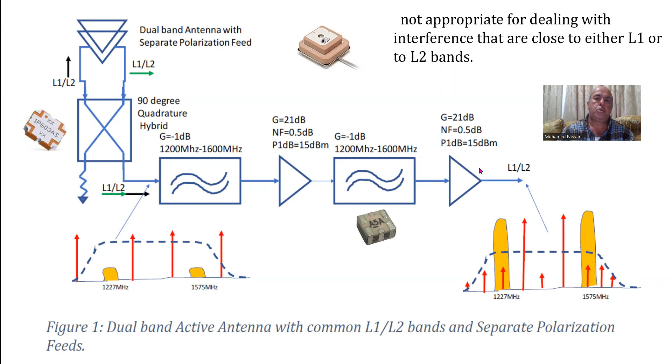So in a lot of cases, people say, well, I don't want to use this, let's go another way to mitigate this issue. And that is basically to split off the bands separately. Since we're using two separate antennas, let's make each one have two feed probes that are orthogonal. Then we combine them again and amplify, and then combine them later when you filter them and they're very clean. You can combine them and process them in the same A to D because they're so close in frequency and the levels are controlled.

So here's an antenna, which in this case is a stacked antenna. These are commercially available, there's tons of companies that build these ceramic antennas, and you buy them from China for fractions of a dollar, so they're pretty cheap.

So you get the antennas, and there are two antennas here, L1 and L2 designated, and each one will have two feeds. The two feeds are vertical and horizontal. They get lined up with the quadrature hybrid, the 90-degree hybrid, which phase shifts one of the elements so that they are actually in phase.

And then, of course, they all contain the interferences. But what happens in this case, for instance, this path here is the L2 path, which is the lower frequency one. As you can see, what we can do is get a narrow filter that filters out only the L2, and the interference all gets rejected. And if there's any leak, if the L2 antenna picks up L1 signals, those will be rejected as well. So you get a very clean signal, you amplify it.

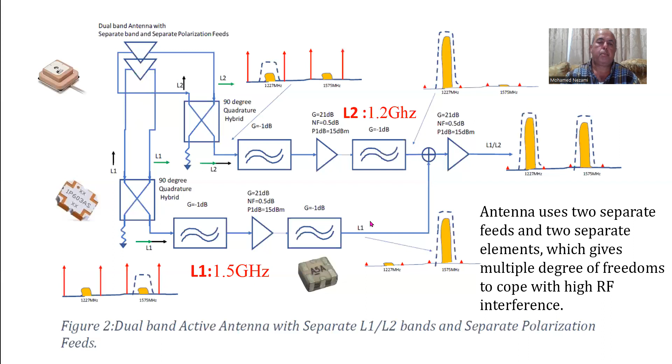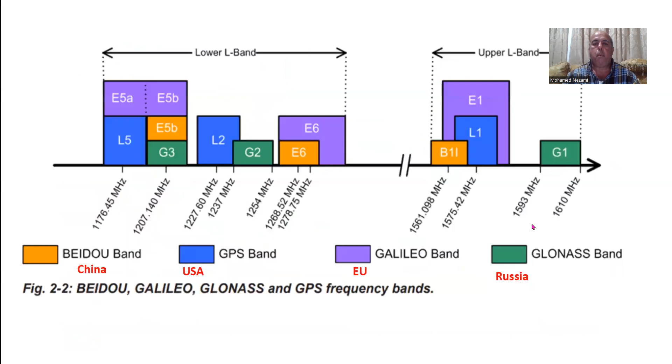Okay, so let's go to the antenna. The antenna is basically, we know that before we could do this, let's look at what's out there in the market.

If you type GPS antennas on Google, you end up with hundreds of these antennas made all over the world, and a lot of them are Chinese. All of them, literally, come in variants like this. Sometimes they would be a single band, or dual band with a single element. And sometimes they would be stacked, like in this case and in this case.

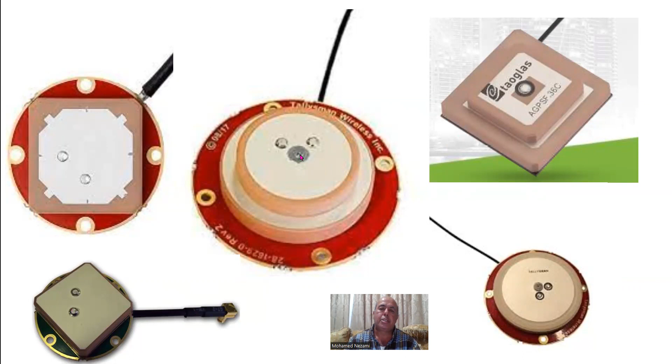They're stacked, and sometimes they have a single feed, you can see here there's a single feed, or a dual feed. This screw here, that's just to hold this patch here with this patch to the board, because this patch here, the L2, this is the rounded patch, and the L1 here, and a lot of times they have glue.

You attach them, you attach this one to this one with glue, and then you have dual feeds that go in from the bottom of the board through the L2 element. There are holes that let the pins come to this surface and get soldered here. These are both orthogonal feeds to the L1 band, where the L2 band also has two of these on this side, but you don't see them because right now they're obstructed with the L1 here, but they're below, okay?

This one you can see here has only a single element, but it does have a dual orthogonal feed. Same thing in here, same thing in here. This one doesn't, okay? So today, the design I picked to demonstrate is based on a survey of antennas in the literature, and I just happened to pick one that has two patches, and it's circular.

The first one down below is the L2 one, okay? It's basically a circular patch resonator antenna, resonating at the predetermined center frequency of L2, which is 1.227. And then it has 4 eye slots. We call these eye slots, okay?

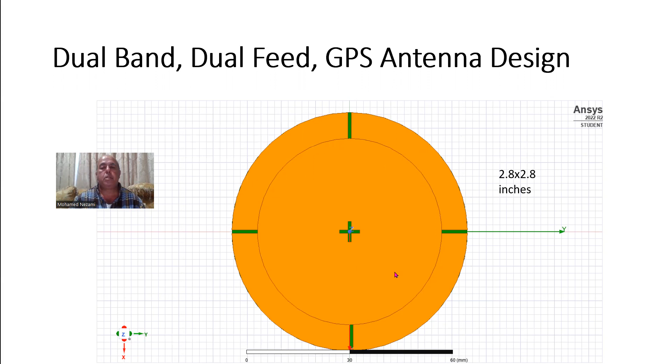The antennas that I just showed, these ones here, you may have noticed that they're all ceramics, but they're all thick. You can see that a lot of these are almost 1/2 inch or 4/10 of an inch. And the reason for that is to actually get better gain and better bandwidth, okay? Of course, doing it this way, it's heavy, and it can get damaged.

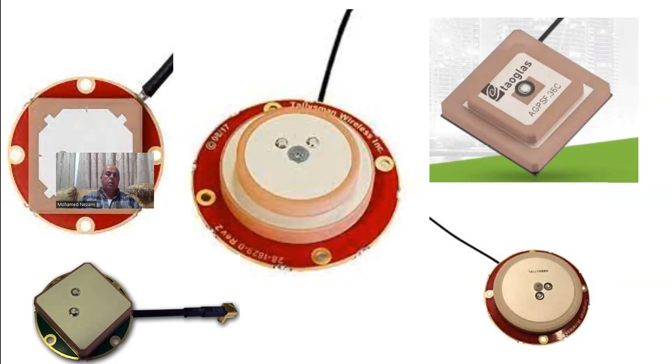So I thought, let's just see if we can make this on a substrate and get almost the same performance from, say, a 64 mil substrate, both for L1 and L2. And so that's what I did. So before we do that, let's just go to...

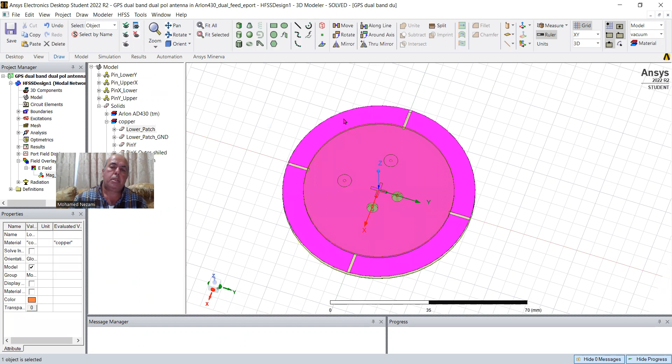HFSS. And so this is what I have right now. So I laid out, this is the L2 patch, and this is the L1 patch in here. And then I have the slots, of course, in here. And then what I have beneath is actually 4 feeds.

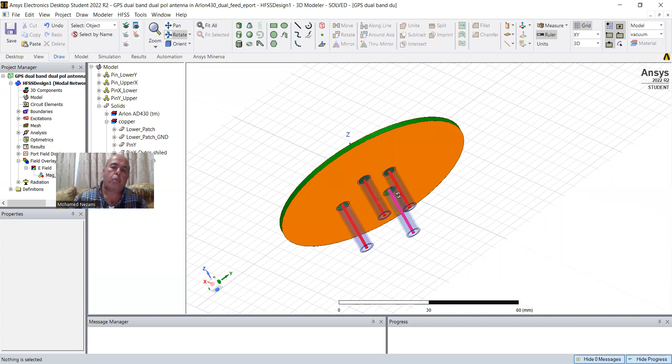And these 4 feeds, they're to pick up the vertical and horizontal from both bands, and they are basically distributed. Let me see if we can. Okay, you can see here, there's one. They're 90 degrees.

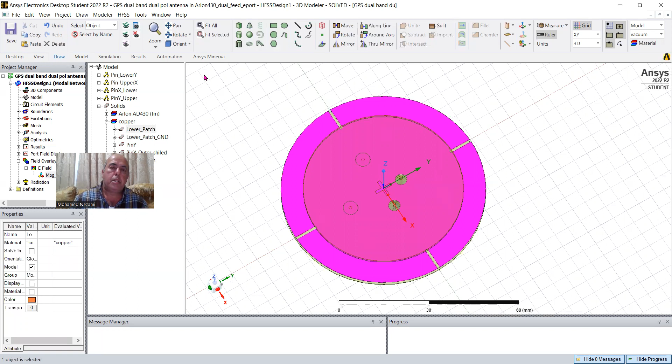Okay, like this one here. As you can see, this is the one on top. So it's soldered to the top. Where the one below, you can see the holes in there to get to the bottom, okay? I'm sorry, no, I meant the other way around. I apologize. This is, if we go, let's see, look at this way.

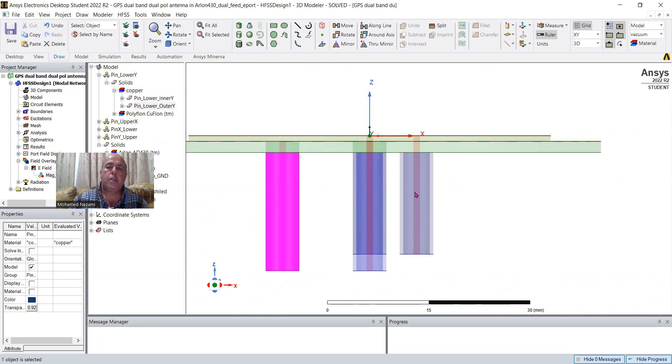Okay, so you can see here, this is one feed, and this is another one, and you can see that these two here, the shorter ones, are for the L1, and you can see the center pin going to the top and getting attached to the top, okay? Which is this copper, this patch here.

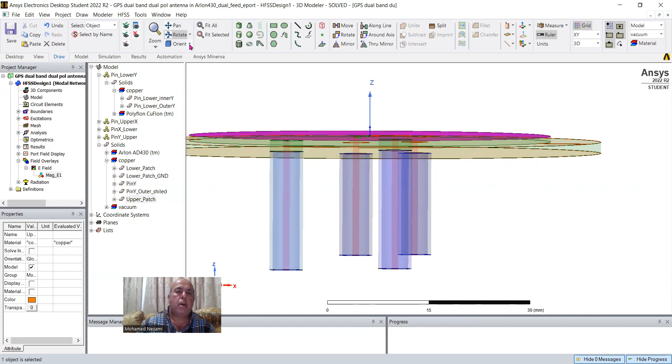Okay, so let's go to the upper patch. You can see the upper patch in here. This is attached to this one and this one. Now there's the other feed for the L2 down here. You can see it, and that one is basically hooked up to the lower patch in here. Okay, so the antenna itself is made of two stacked layers, and the material I'm using is Arlon AD430 for this material.

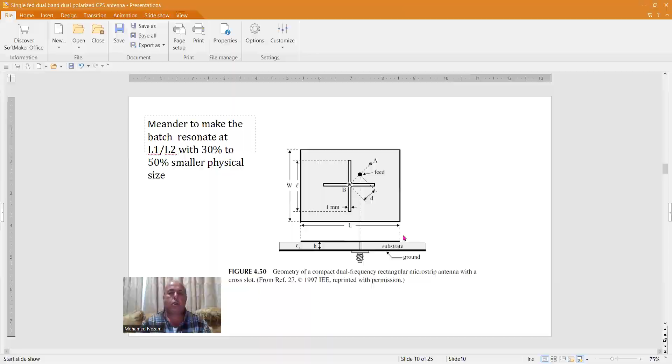So before we see the performance, let's just get back and talk a little bit more about how the antenna is designed.

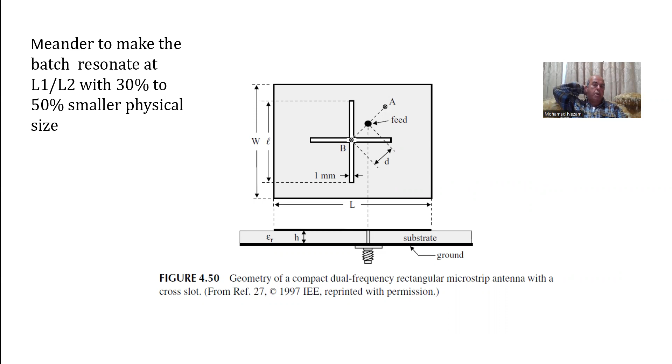Now, like I told you, the publication has a lot of these antennas, and that antenna I picked up from one of the publications did not work, honestly, the way they designed it. It's unfortunate that with conference papers, you try to repeat the results and realize these guys didn't really report actual designs, because you can build it with the same dimensions and same material but still not get the performance. In fact, in that case, it didn't even work for the substrate they used.

So I ended up with almost a different design by the time I optimized it and figured out how to make it work. But anyway, you see these patches of antennas laid out in the IEEE. There's so many of them.

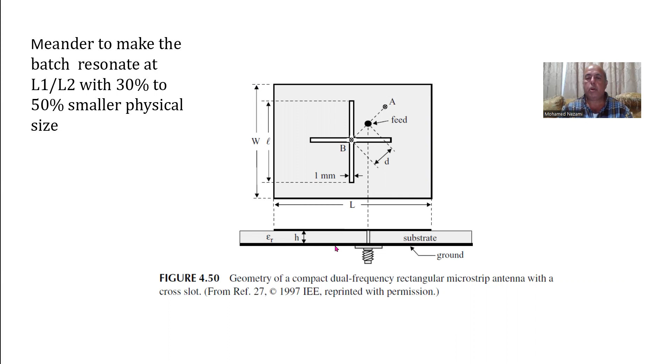For instance, this one here uses centered crossed slots, and the feed is right here. The difference between this and the one I've used is that I used one circular, this is a square, but it's exactly the same, except for the resonance dimension. This one here is circular, and it's reported - these are actually from one of the books, I think it's called the Low Profile Antenna Book. I grabbed it, but it's also a publication in the IEEE.

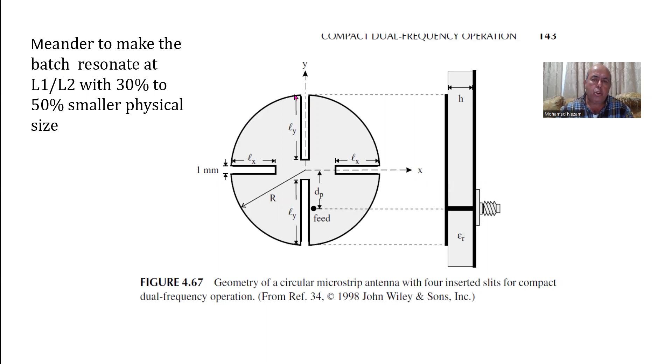So again, the reason for this is that you can resonate at the same frequency but reduce the size, and that's meandering. That's what we have, again the same one in here. Here you can also make it square. So these are very common.

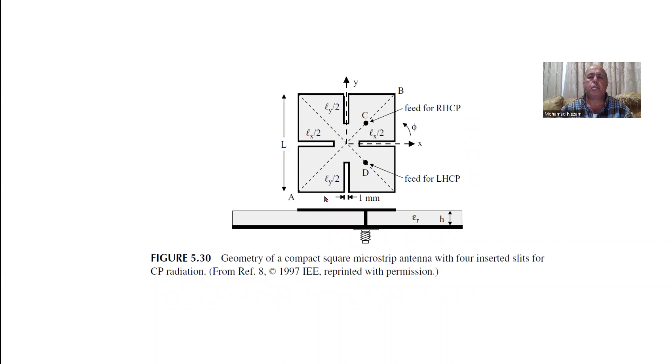And so we've got slots. The top one has the cross slots, and the lower one has the edge slots. This is very clever because, as you can see, we can't really use the crossed slots on the bottom one, but we do use it here where it's exposed, because you have to use it on an exposed surface.

Another view on this from the bottom, you can see - this is basically a coaxial line right now, but you can...

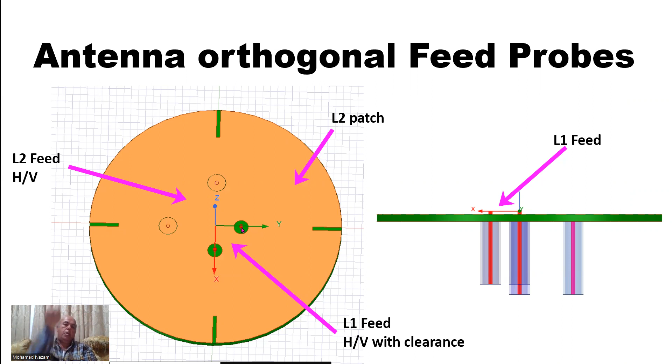So the hole - we don't want to drill out the whole entire area, because we really need to use this as a dielectric medium for the center pin to make up a coaxial conductor to go up to the top.

Now I'll run this in a minute in front of you, but what we end up with when we run this is this: we resonate at 1.2275 and then 1.575. In this case, you can come down to the minus 10 dB return loss and measure the bandwidth of those two, and that's what you get here, which is pretty good. So M3 to M4 - that's 36 from 18, so that's very good, well around 15-some megahertz, which is good.

Okay, and this is very good. You can see, of course, one of the impairments of doing this stacked business is you get coupling between the two antennas. For instance, the L2 here doesn't resonate at all—it won't pick up any of the 1.57 L1 signals because the return loss is basically short at that frequency. But on the contrary, the L1 can pick up a little bit of L2 signal, but that's really negligible because the LNA that this antenna feeds into uses separate paths, so this gets filtered anyway, so we don't care.

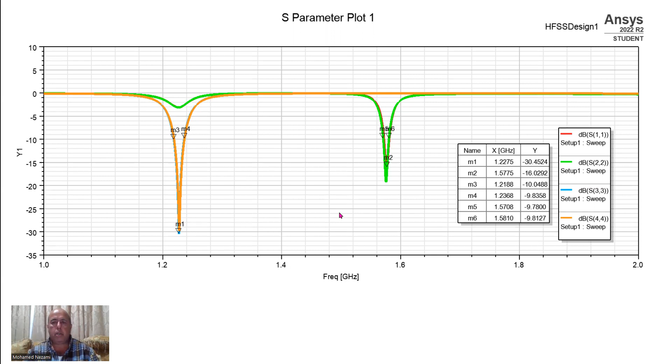Just to see, in fact we will show this in the performance in a minute when we go to HFSS. The gain on these two, we're getting about 1.76 dB for the L2 and 2.27 for the L1.

Like I told you, these gains—this antenna is small, so it's only like 3.5 inches, 70 millimeter by 70 millimeter. Most of the antennas are like that in these cases because these are not tiny devices. So that's about how much you can get, you won't get more than that. And that's why all GPS LNA front ends have a huge gain—they're 60 dB gain a lot of times. So the antenna in this case isn't really helping you a whole lot in picking up signal.

But it's good to have it so that at least you have a selective and narrow beam so that you can reject the interferences and the multipath.

And as you know, for those of you who have been exposed to the signal processing of GPS antennas, how it extracts the phase offsets and time offsets that contain the coordinate information—you would want not to have multipath. You want to try as much as possible to see a direct path to the satellite, because that's what introduces the errors, since the whole system is based on delay estimation. So if you're getting a stronger signal from a multipath than you would be getting from a direct path, you're going to think the satellite is actually at a different location than where you are, and that introduces error.

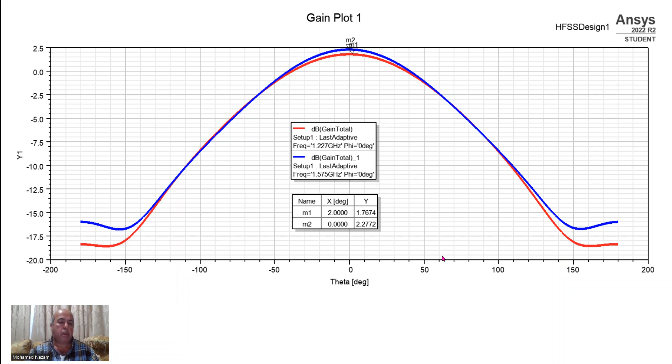And of course, a lot of you maybe back in the 90s when we were using GPS antennas in cities, metropolitan cities like New York, Los Angeles—when you go into downtown, you'll notice that navigation on the streets misses a lot of times, whereas if you go out on open areas, it's extremely accurate. Surveyors who carry these antennas may have realized that most of the time it's because when you're in a metropolitan area there's so much scattering and reflections, and you end up with the receiver having to cope with a lot of it.

The axial ratio is basically a ratio that tells you how good the signal is, because we pick them up separately, vertical and horizontal. So we want to make sure they're equal—we don't mess up the ratio between them, because that actually deteriorates the signal. Theoretically, what you want is 0 dB if possible, meaning they're equal.

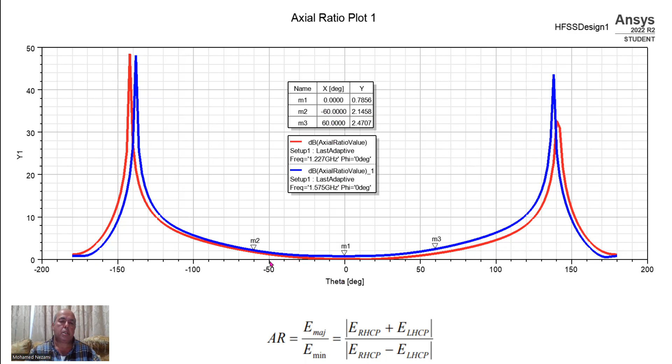The axial ratio is defined as this, but this is from HFSS for the dual antennas, the stacked antennas, and you can see it's pretty good. Usually these are specified by how much angle you have between the 3 dB points. In this case you can see we have 60 degrees, that's 120 degrees, which is pretty good.

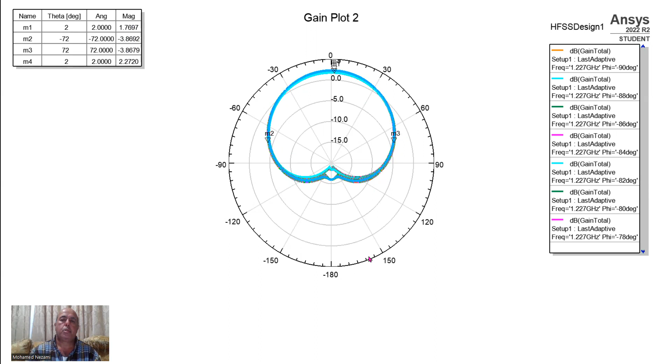One thing HFSS is good at is we can excite the antenna and observe the circular polarization through the current surface density or the E field distribution in the substrates. So in this case I plotted the E field through the feed medium, which is Teflon, and then the substrate. You can see the top substrate is being excited, and the lower one doesn't have an E field—the E field is just going through it. That means I'm looking at the excitement of the L1 band, which is the patch on top.

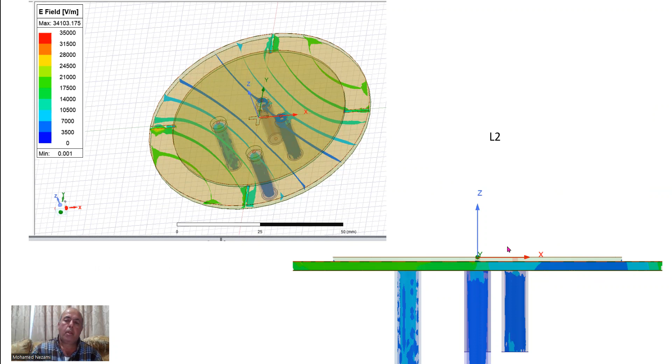Likewise, you can see the bottom one, that's basically the signal on the bottom. You can see how strong it is on one side and small on the other, and that's a sinusoidal distribution of E field. It varies with time, but it was picked up at this moment. You can see the same thing here for the L1.

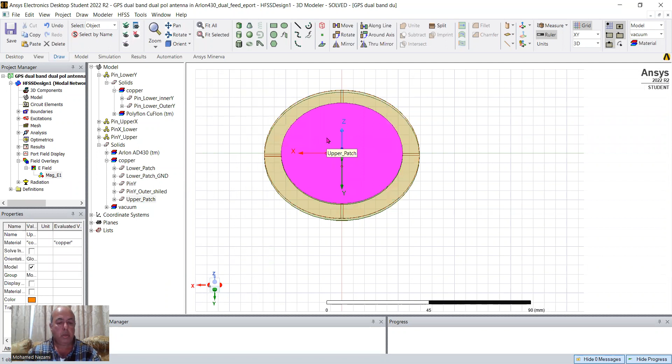Okay, so let's go to HFSS and observe this. Let's again detail the antennas. I'm going to hide this guy and hide this guy. So what we have right now is basically the lower substrate.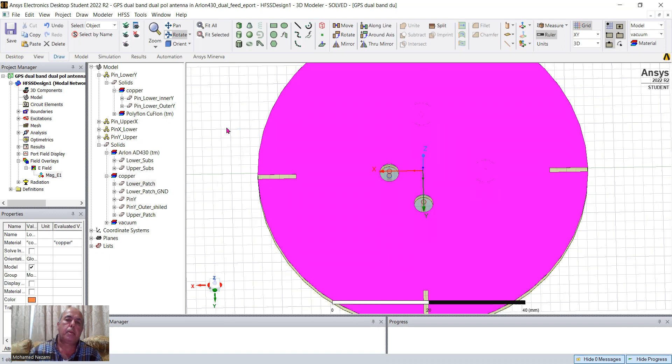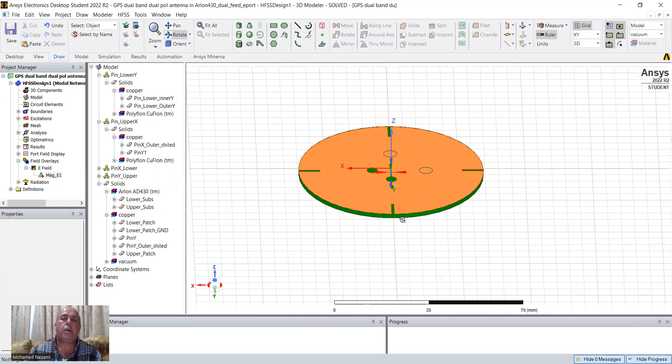What we have is a circular patch antenna with these slots, and then we have these here. This is the center. Let me hide them so we can see. Basically what we have right now, I didn't drill a hole, but that's okay. There should be holes in here for the center pin, but in this case, because the electromagnetic simulator gives precedence to the metal over dielectric, we didn't care.

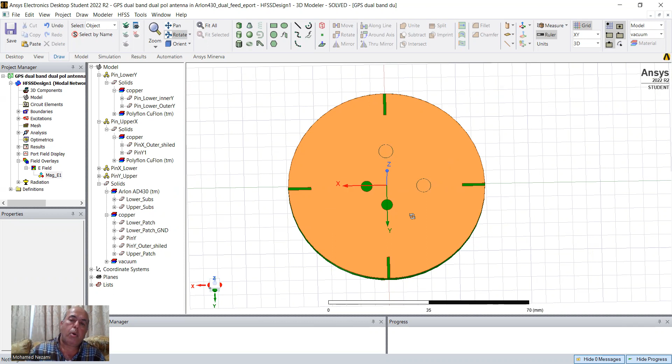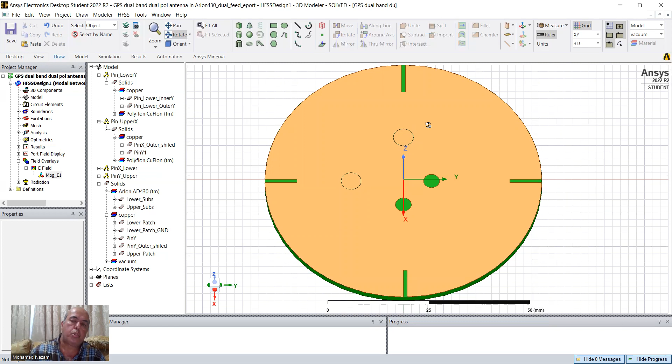In real life, what we would have is, of course, these are the holes in the substrate for the feed where we solder. In actual life we have holes that solder to the pins, and these clearances here are for the pins that connect to the top one.

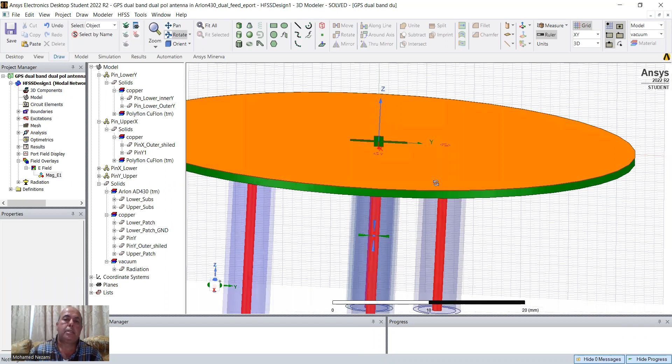So let's go and show the other patch now. Let me hide this. Okay, so this is basically the lower patch—I mean the top patch—and you can see, if you look at the side views on this, you can see that...

The shorter ones, of course, are for—I made them so that I distinguish them. This is what feeds to the top, these two here, where the other ones are the ones that feed to the top of the lower one.

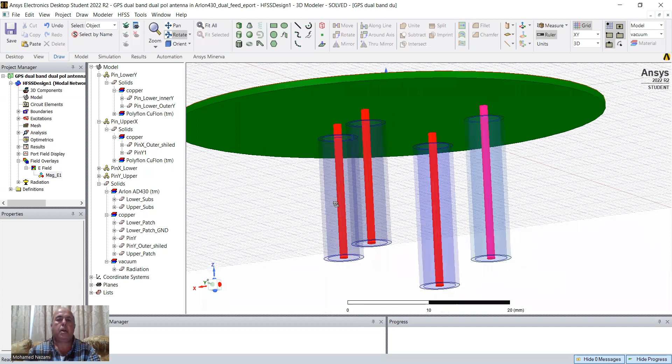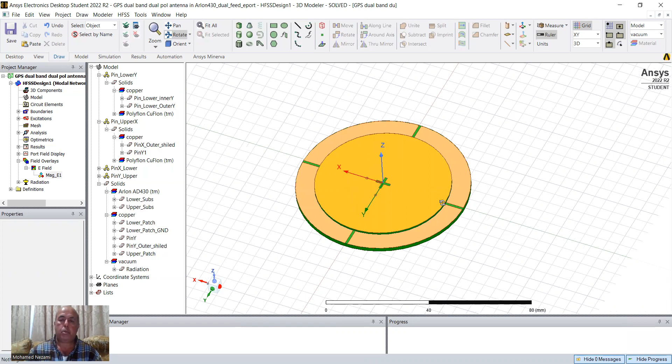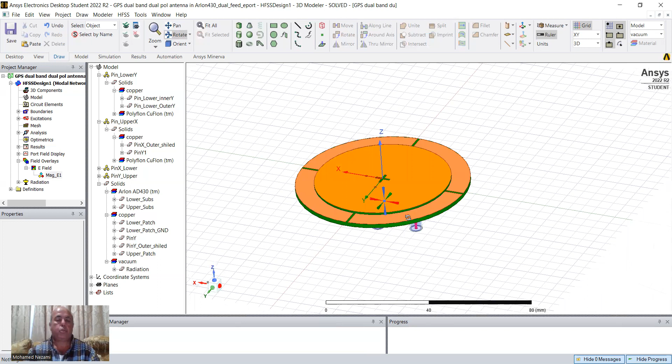One thing I forgot to mention: the lower patch has a ground plane right beneath it, so let's show that again. Now the lower patch has the ground plane, and this ground plane is very important because that's what serves as the ground plane for the antennas. They assume you have an infinite ground plane, which you don't, but this is very important. In real life, this would also be extended and attached to another piece of aluminum plate, and then we'd have a radome case—you may have seen these with surveyors, so here's a globe and then that.

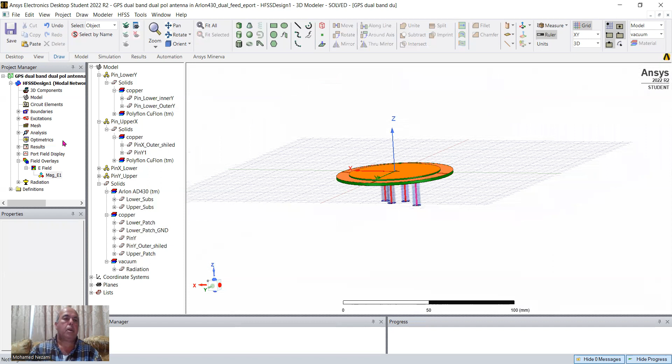Okay, so let's show again, just retrieve all the parts. Okay, so I ran this, and of course we get... let's see what else, I ran this, of course we get this—this is the frequency response, the return loss.

Get that at 10 dB, another one here as well, so we can check these signals. So return loss is very good, and as you can see, the L2 has higher Q than the L1.

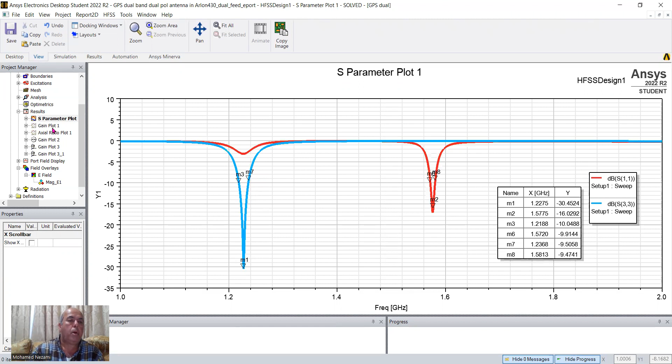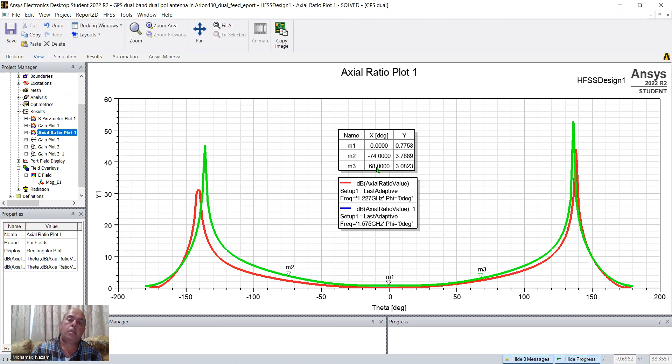The gain, again, is basically this much here for both—right here, sorry. The axial ratio as well here, so you can see between 68 and 74, that's pretty good—almost 70, so 70, 72. That's 142 degrees between the 3 dB points on the axial ratio, which is pretty good.

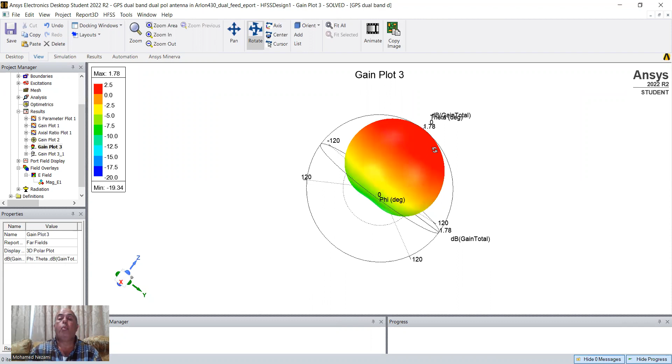The gain again is 2.26 dB for the L1, and for the L2 is 1.78. This here is basically plotting the gain for the first one, which is 1.78—that's the L2, because the L1 is higher gain. Where this one here is for the L1, 2.27 dB.

Okay, so let's look at the E field so we can see right now. So we've got this is the E field right now. Let's see what frequency this is—that's 1.575. Okay, so let's animate that and see what it looks like.

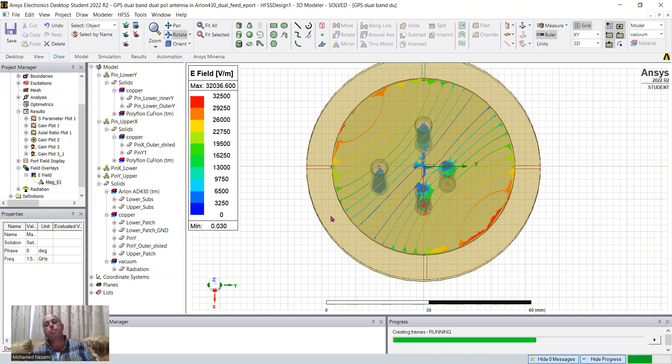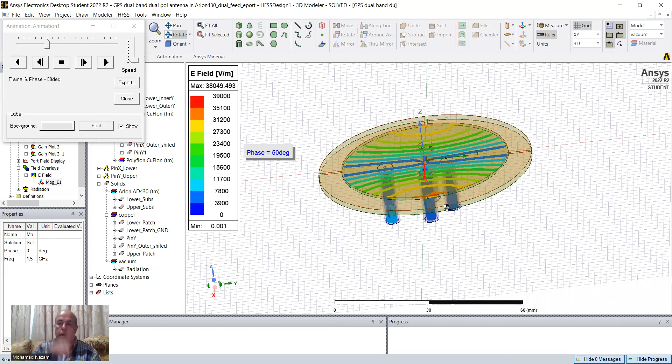So now here's the L1 signal being fed to these two elements here at the top. As you can see, the lower patch doesn't have any E field right now in this case. And you can see it's spinning like this, okay? And the spinning here, of course, is due to circular polarization.

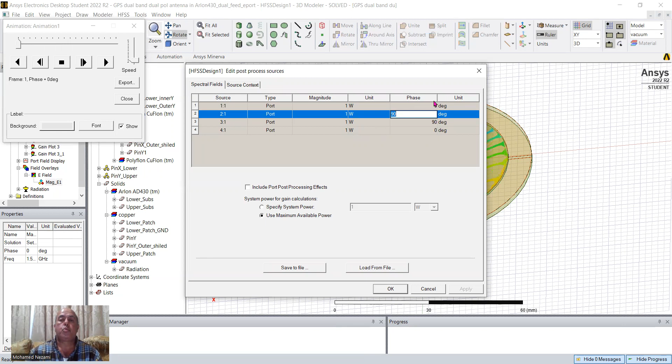You can play around with the actual rotation, whether it's right hand or left hand, by simply going in here and playing around with the 0 and 90 degree settings. If you swap these, it will do the counterclockwise rotation. This is very good sometimes to show engineering students doing antenna designs at the beginning. So let's stop this and go do the other frequency—we're going to look at 1.227.

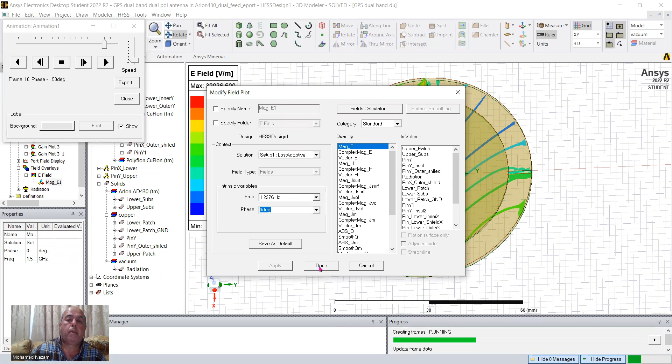Okay, now we've got these two excited, and you can see that the field is in the lower one. See that?

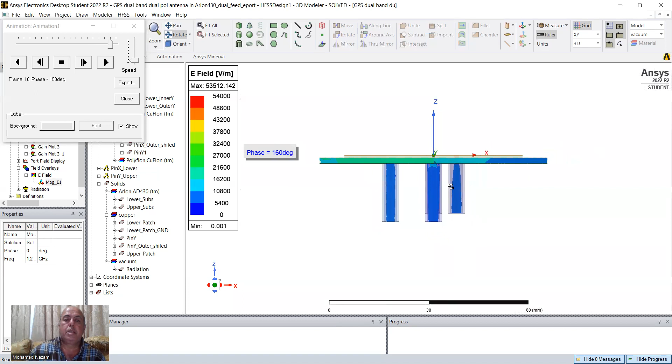We can see that better sideways. On this you can see the interaction is actually happening at the lower substrate. You see the E field, how it is? Of course, the signal leaks a little bit into the other two ports as well.

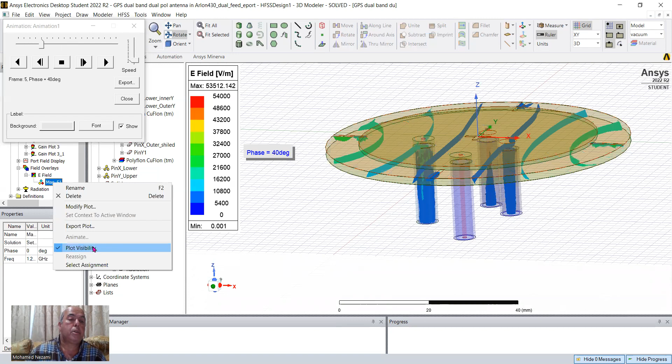So let's go back to the other frequency. I didn't show it sideways. Let's go back to 1.57 gigahertz. So that would be the one on top. I can see that the shorter one is the one feeding.

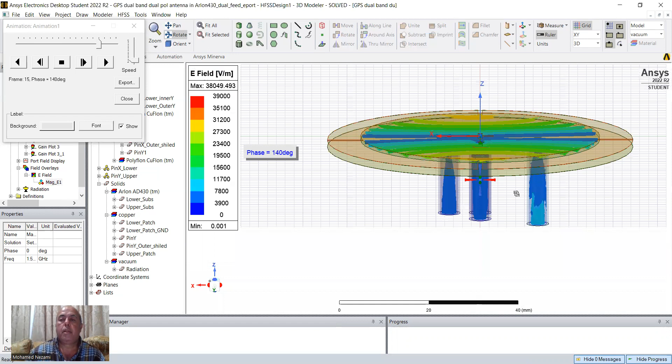I'm sorry, it's not leakage between the two. I'm actually exciting all four ports, okay? Of course now you can see that it's only the, just out of curiosity. So right now we're at L1, I'm going to show you.

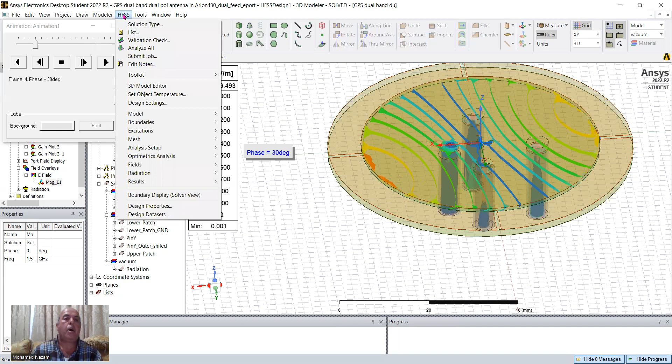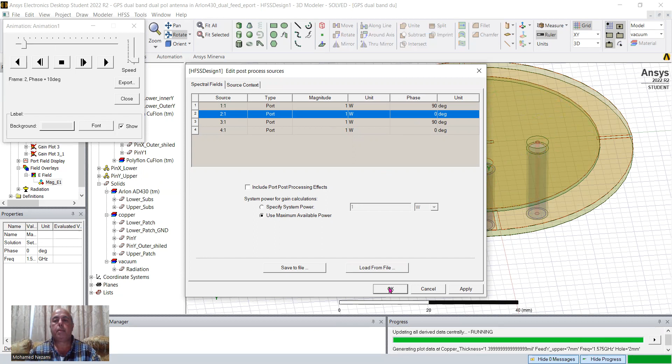What happens is if you flip the polarity of the hybrid that feeds the antenna, the 90-degree hybrid, for instance, that would be equivalent to doing this. You can go in and put 90 degrees here and then 0 degrees here, and you can watch it go the other way around. There you go, the same signal, but it's going the other way around now.

This is funny, but it brought to my mind an associate of mine when I was doing an LNA design. We designed it, did it correctly, and went into the anechoic chamber, attached the antenna to it, and didn't get any signal. But I know it works, because without the antenna, if you feed it a 50 ohm load, it works perfectly.

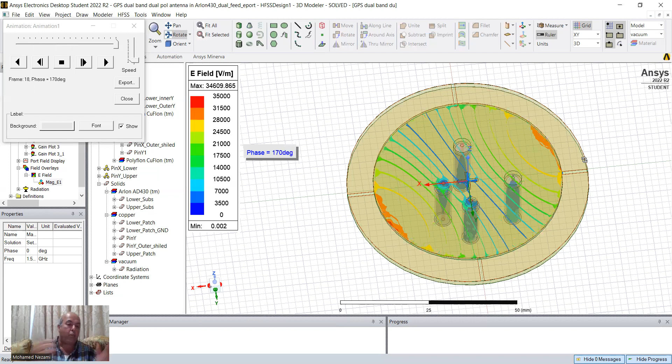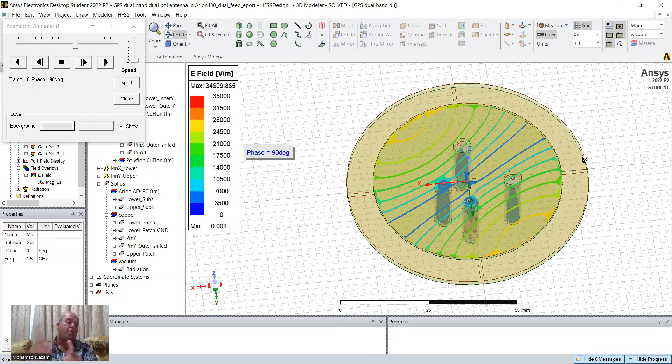When we looked at it more and more, we realized what we didn't catch was in the PCB layout, we made a mistake on the hybrid. We reversed the outputs between the 90-degree and 0-degree, so it was horrible because that means you have to spin the board again to correct the PCB for that. But what we did, at least for that, is just swap the test equipment signals on the circular polarization, reverse the vertical instead of the horizontal. At least you can get the same thing, even though it doesn't work in real life, but for the application of picking up a satellite signal and extracting coordinate information, it works.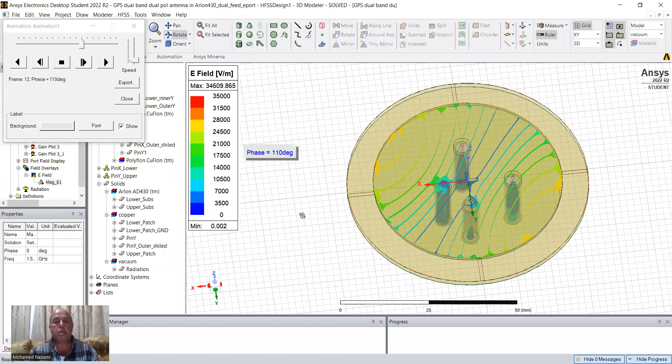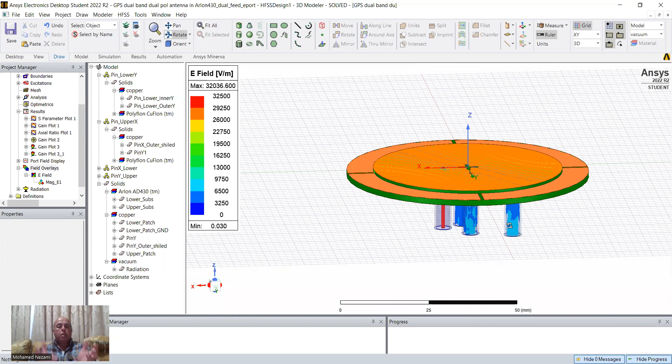So now all you need to do on this design is take this board and send it to fab. You can export from HFSS to a PCB and then attach your LNA if it's on the back—we usually put the LNA circuitry right here, and the hybrids will go in here, so you can do the whole LNA on here. Then you can house it, and that would be a product, just like the ones you see in real life. For those of you that attend the training, you can take this and actually send your board and build it yourself. We'll show you how to send it to a PCB house in China or elsewhere in the United States, and before you get home, the PCB will be right at your doorstep, so you can actually prove the concept and the actual performance of this.